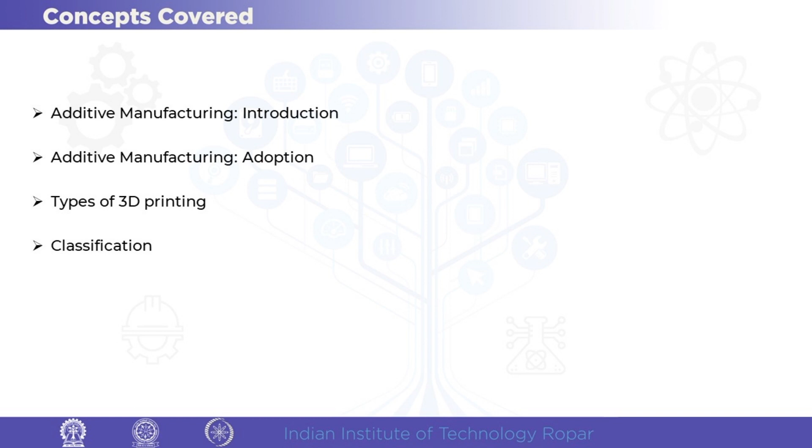Additive manufacturing is a new revolution in manufacturing. Driven by cutting-edge technologies and breakthrough innovations, additive manufacturing is reimagining production processes, redefining sustainable manufacturing. Additive manufacturing is currently more than 2.2 billion worldwide.

If you see the machines, there are a lot of machines which are being currently sold across US and globally. In India also, a large number of machines are being sold by various companies. The data which I am having is from 2012. At that time, lower cost machines, 35,000 were sold in US and especially in other places, and in US also the bigger machines were only 6,000. But now things have changed.

Now what we have is, with 20.50 CAGR, global additive manufacturing is supposed to be worth 34,846 million by 2028.

So welcome to the world of additive manufacturing, which is transforming India's manufacturing process and the worldwide manufacturing process in a very big way. It is opening new pathways to economic, technical and logistic advantages in the manufacturing domain. Additive manufacturing takes 90% lesser time and consumes 80% lesser energy.

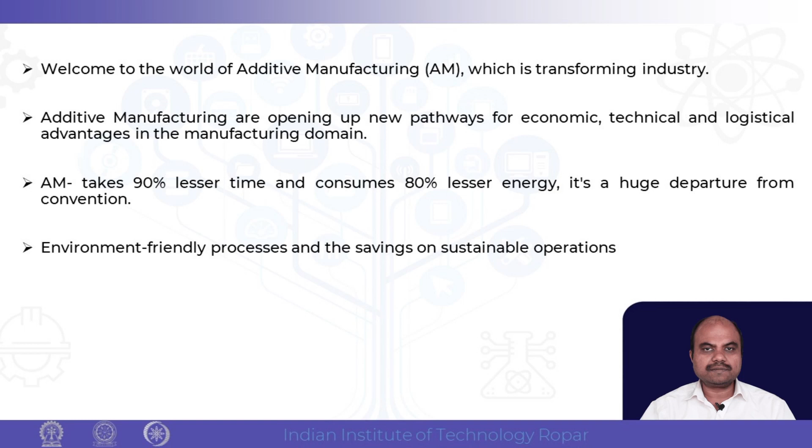While conventional subtractive manufacturing creates a 3D object by machining out material, additive manufacturing is popularly known as 3D printing. It makes layer by layer manufacturing and builds products in minutes. Both smaller and bigger sized components can be made using additive manufacturing. Very small, micro level printing is possible, whereas even in civil systems, bigger projects using additive manufacturing are also possible.

So additive manufacturing, or rapid prototyping, or 3D printing, prints faster and significantly reduces time to market, very fast. Whenever you want to print something, you make the CAD model, convert it to an STL file and give it to the computer, and the computer gives it to the 3D printing machine. So the time from design to manufacturing is very less, and this speeds up the overall innovation.

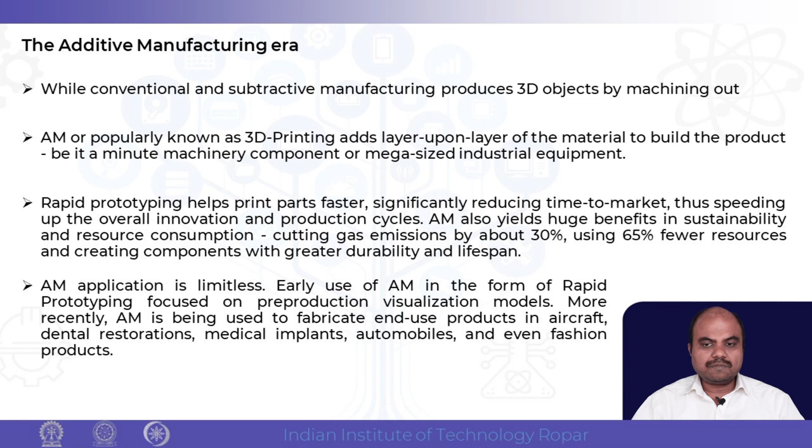So if you design a new technology or new product, you don't have to wait for a long time to actually realize it. Very fast we can design and produce a part in less time. So it is a huge benefit, and it's sustainable also. Resource consumption is less, cutting gas emissions are reduced, and applications are limitless. Various models can be fabricated, and it has various applications in various industries.

So whenever we see it adding up, almost 34% of US manufacturers have already adopted additive manufacturing in their manufacturing plants and manufacturing systems.

It is not required that we have to remove the traditional manufacturing process. Additive manufacturing process can replace some portions or some processes. However, it should actually be an addition to the manufacturing technologies and machines which a company already has, so that companies can use the added advantage for multiple applications.

So applications are diverse, from automobiles, energy, medicine, aerospace, so many applications. NASA has successfully used rocket injectors made with additive manufacturing, and in Formula cars, 3D manufactured products have also been used. A wide range of materials can be covered, which can be used for industrial applications and also for other applications.

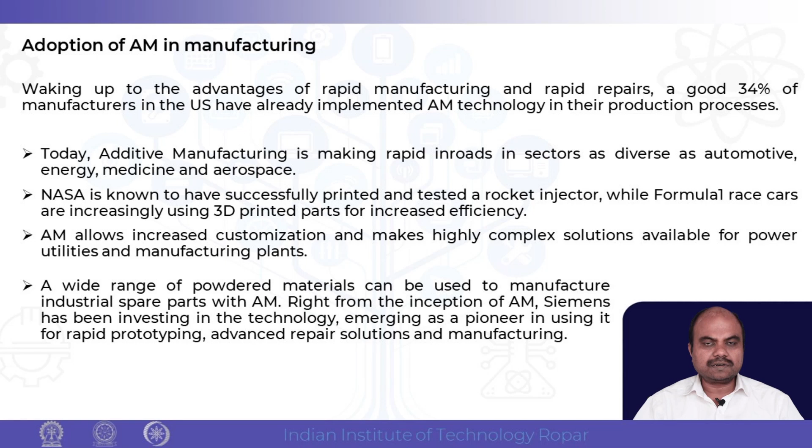So additive manufacturing is also known as 3D printing. It refers to a manufacturing process which creates a 3D object using multiple layers of material to form a component. There are various methods for additive manufacturing, and various materials can also be used like glass, plastic, ceramics, metals.

There are also other terms like 3D printing, rapid prototyping, direct digital manufacturing, layered manufacturing, and additive fabrication. All of them are similar kinds of terms used to depict the additive manufacturing setup and processes.

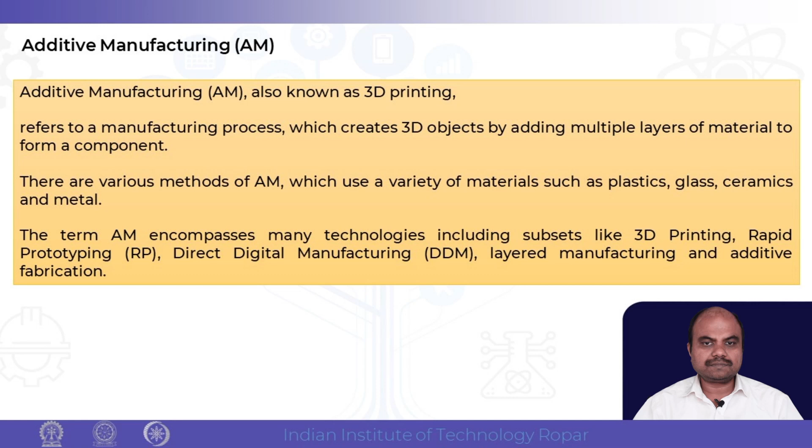As per standard, there are various additive manufacturing processes, but there are 7 major additive manufacturing processes which we are going to learn soon. And why this difference is in terms of building mechanisms, price point, materials, usage. There is a little bit of difference in all this. Actually, some of them are quite different with respect to each other.

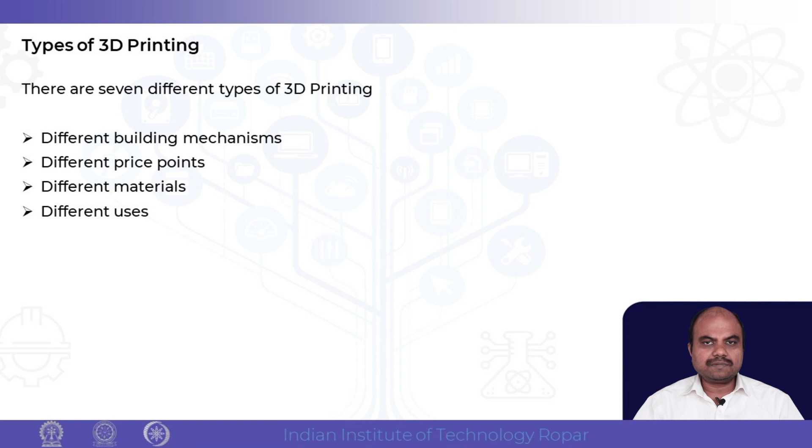So why is additive manufacturing used? It is used for prototyping, low volume manufacturing, and tooling. Tooling means - previously, especially for plastic bottles or anything you want to make, dies are very expensive. You have to use 5-axis, 6-axis, 7-axis milling machines, CNC milling machines to make a die, and it takes a lot of time also. Now, many tooling processes can be done in metal additive manufacturing, and of course post-processing is required, but that is much less time consuming compared to the total time required for conventional manufacturing.

Consumer products can also be made. Customization is very much possible with additive manufacturing because previously we used to have one design which is being made multiple times. Now, with additive manufacturing, every time we print we can customize it easily.

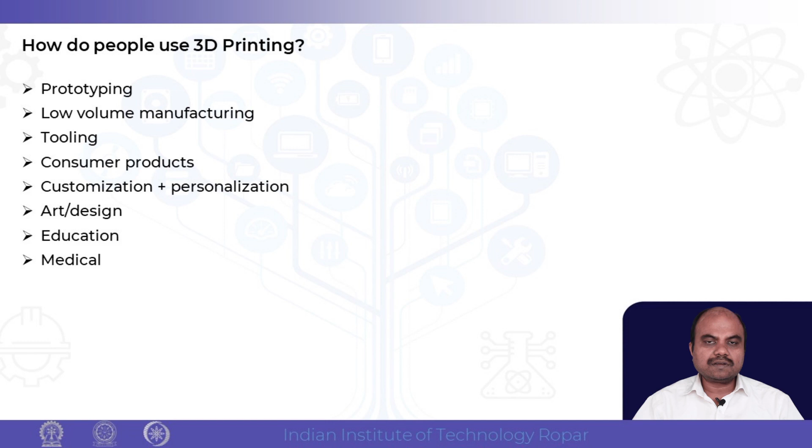Art production can be done with AM also, and see how it looks. For design checking, you can make more prototypes and check whether the design is okay or not. Apart from that, the same prototype can also be analyzed. For education, AM is used. For medical, there are a lot of applications, many places AM is used.

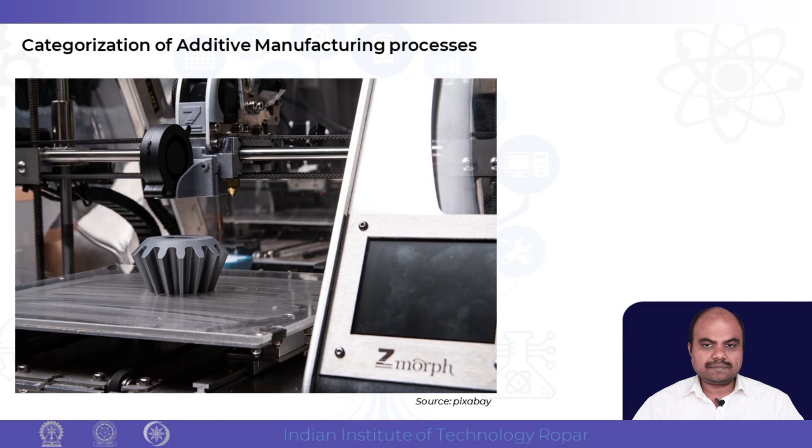So now, categorization of additive manufacturing process. Here you see one image of a metal additive manufacturing machine. As per ASTM F42, additive manufacturing processes are classified into 7 major categories. The difference between these is basically the material used, the deposition technique used in the machines, and the way the material is being fused or solidified.

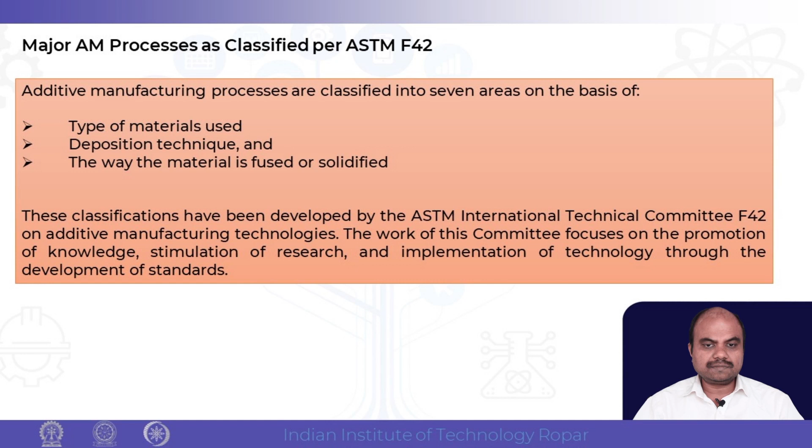So what are the 7 additive manufacturing processes according to ASTM F42? One is photopolymerization, second is material jetting, third is binder jetting, fourth is material extrusion, fifth is powder bed fusion, sixth is sheet lamination, seventh is direct energy deposition.

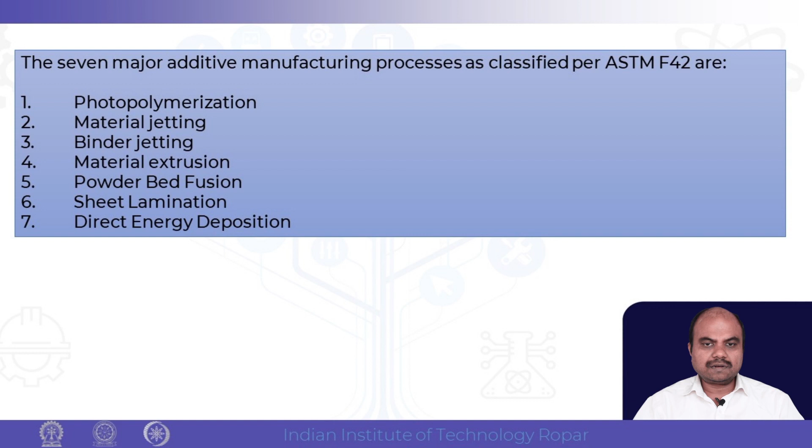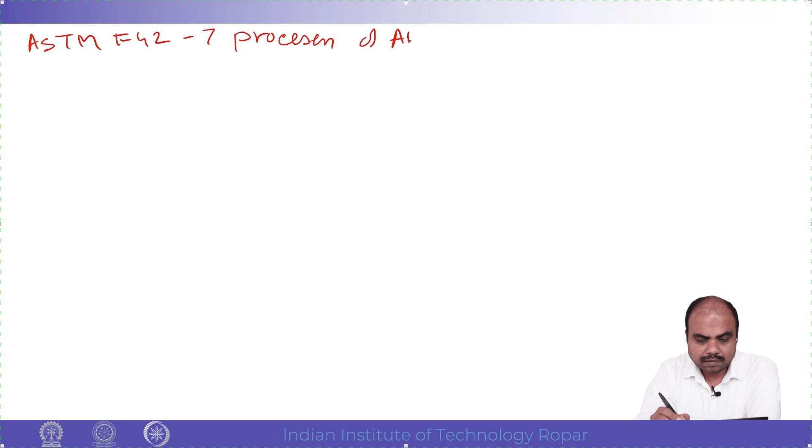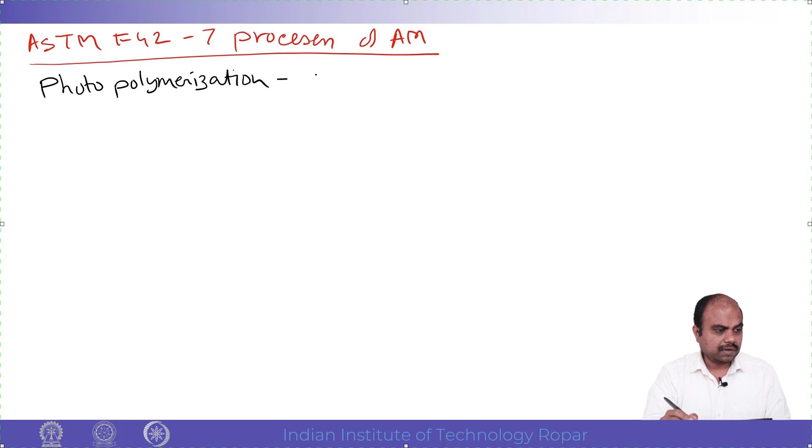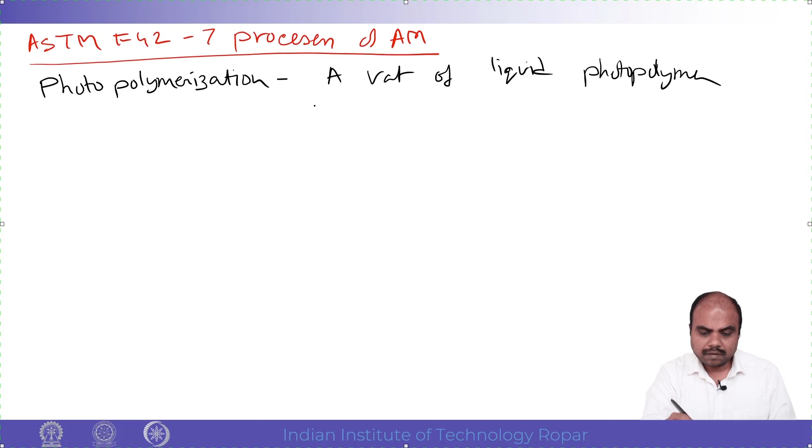Now we are going to learn more in depth. So according to ASTM F42, there are 7 techniques, 7 processes basically. One is photopolymerization. In this, basically a vat of liquid photopolymer resin is cured through selective exposure to light. Resin is cured selectively using light, laser, UV, etc. The next one is material jetting.

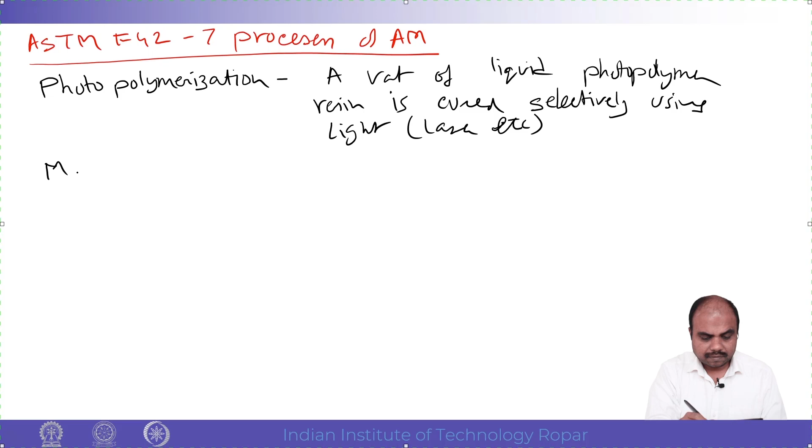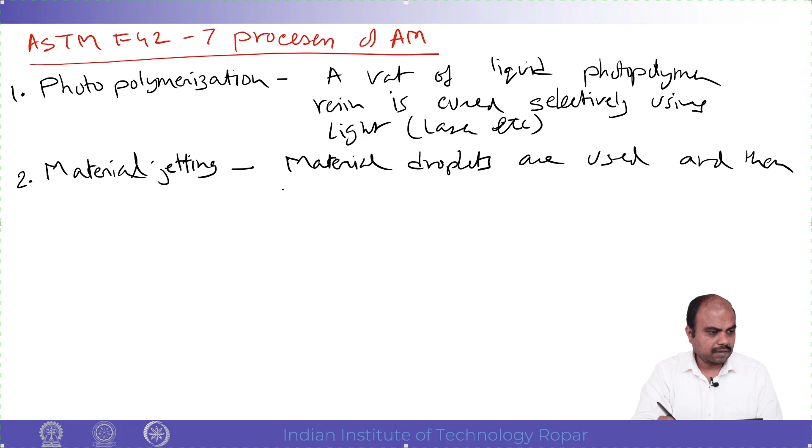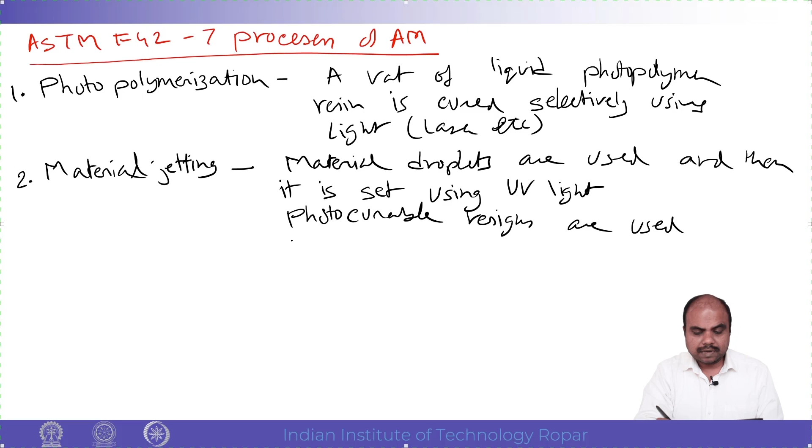Second one - in this, material droplets are used, and then it is set using UV light. So here also photocurable resins are used. This was originally termed as 3D printing.

There are multiple names which exist for this photopolymerization technology. Some of the names are stereolithography, SLA. It is also called digital light processing. These are very similar technologies, but they are not the same - they are a little different from each other. Then there's clip technology, that is continuous liquid interface production - clip also falls under this system. Then there's scan, spin, and selective photo cure. These names exist because different companies are making technologies which fall under the main photopolymerization technique, but the name is different and also the technology is slightly different. Like clip technology is much faster, a little less accurate, but very fast.

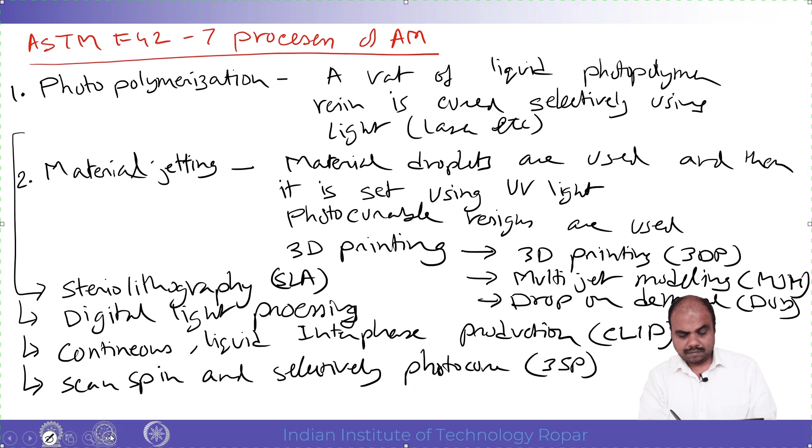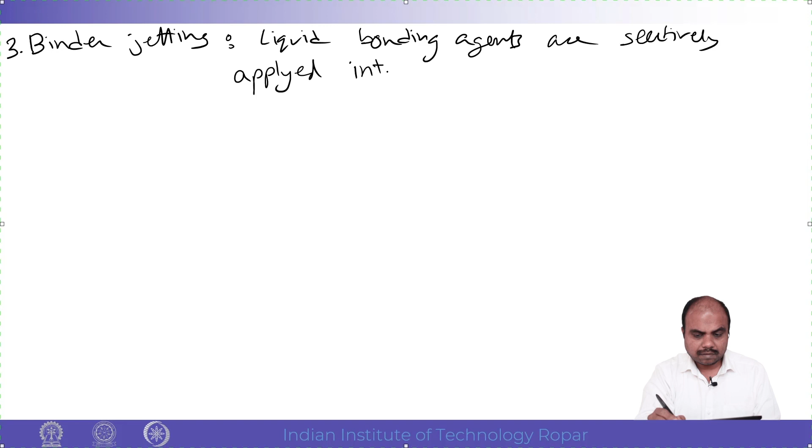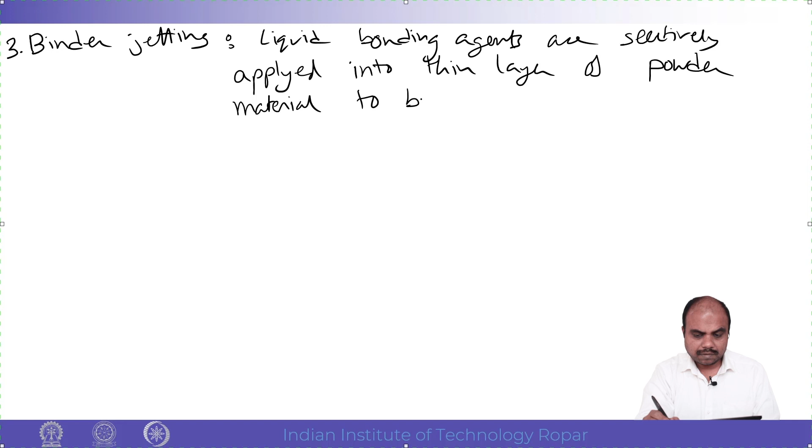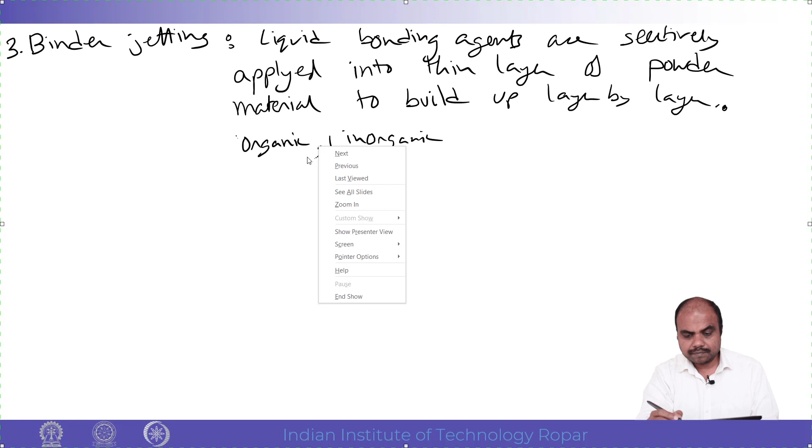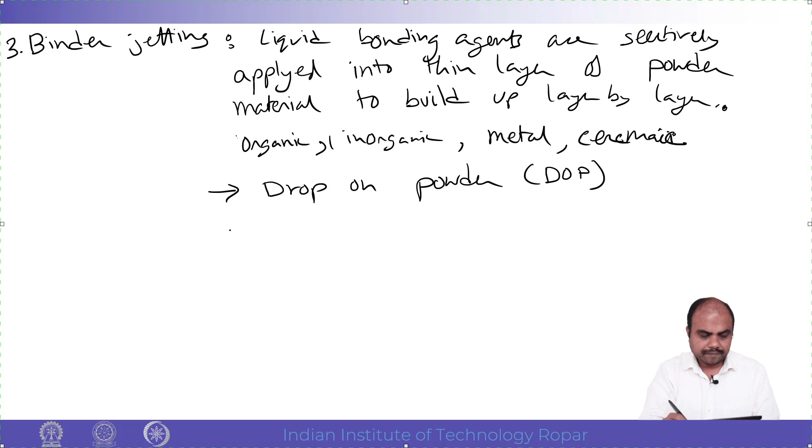In this process, materials can be organic, inorganic, it could be metal also, metal, ceramics, etc. The other names for this are drop on powder, DOP, and powder based printing.

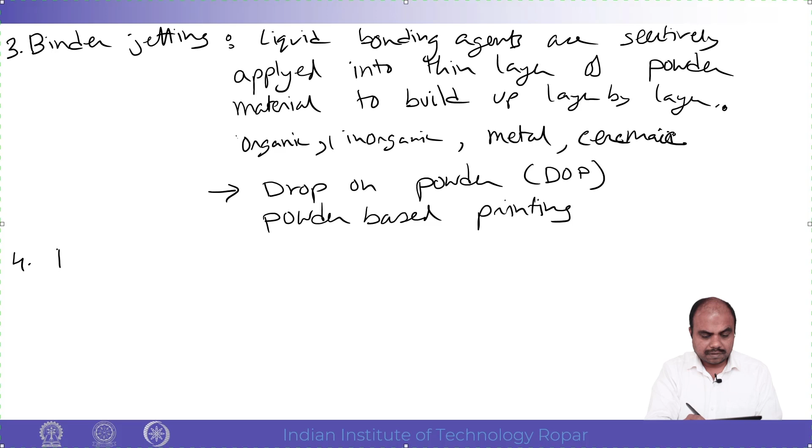The next one is material extrusion. In this, the material is extruded through a nozzle and made into multiple layers. Generally, thermoplastics are used. This is one of the most widely used techniques, and FDM is one of the machines - various companies have actually made this machine and are selling it in the market at a very cheap price.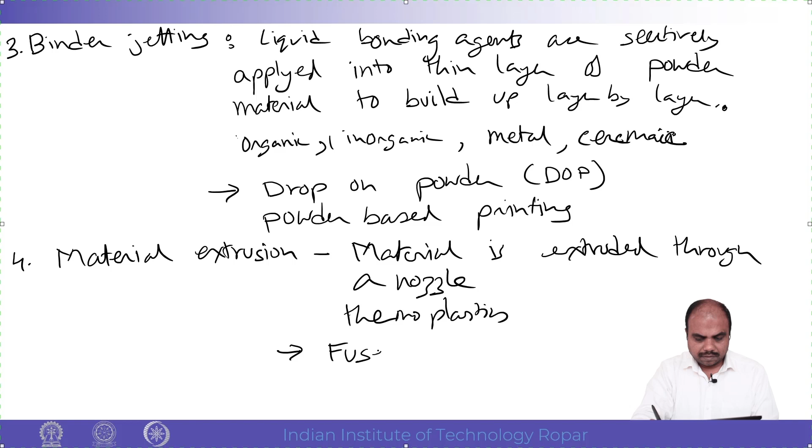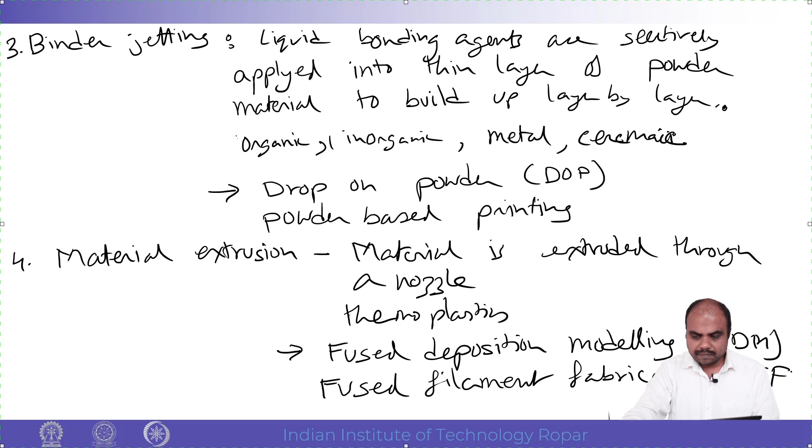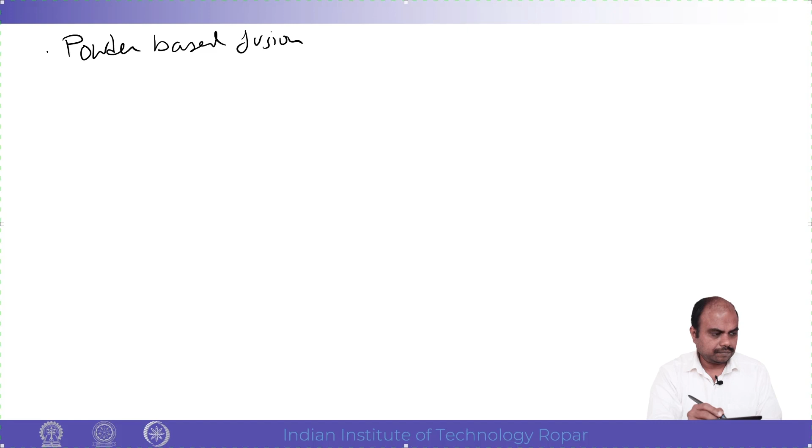The technologies here are fused deposition modeling, FDM, and fused filament fabrication. That is the next one, that is powder bed fusion, the fifth one. In this, the technology is that powder material is selectively consolidated and melted together using a heat source such as a laser.

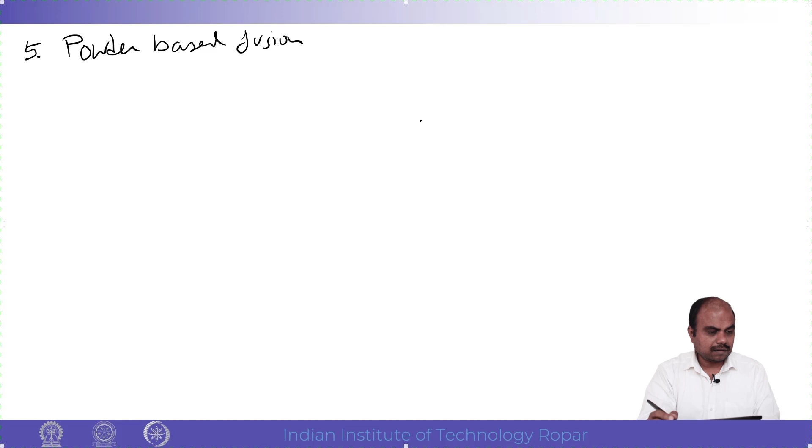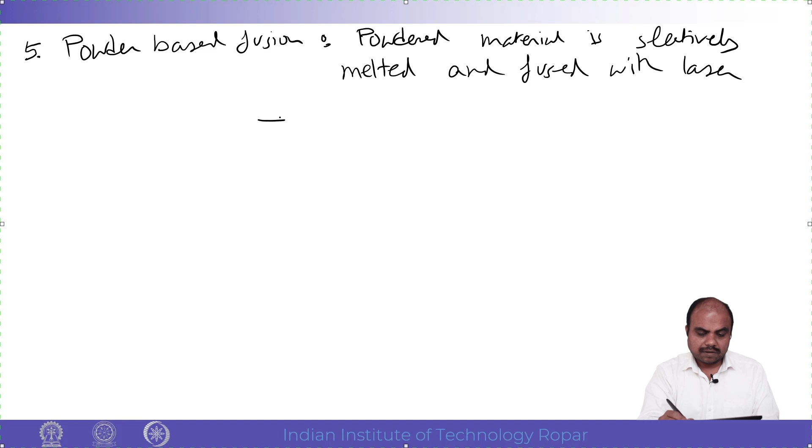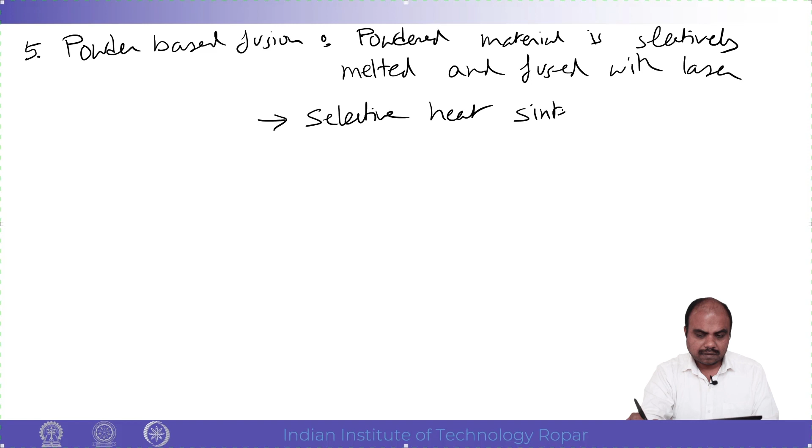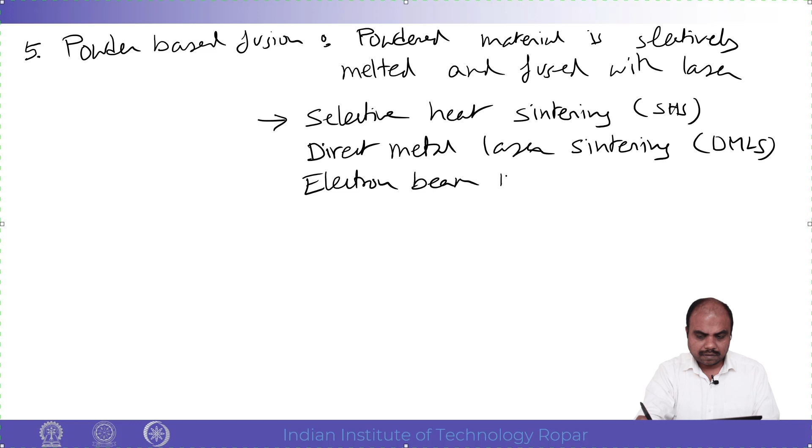So here powder - this is a widely used technique, especially for metal. The technologies which come under this one are selective heat sintering, direct metal laser sintering, electron beam melting, selective laser melting, SLM, and selective laser sintering. This is one of the widely popular names which many of you may have heard about.

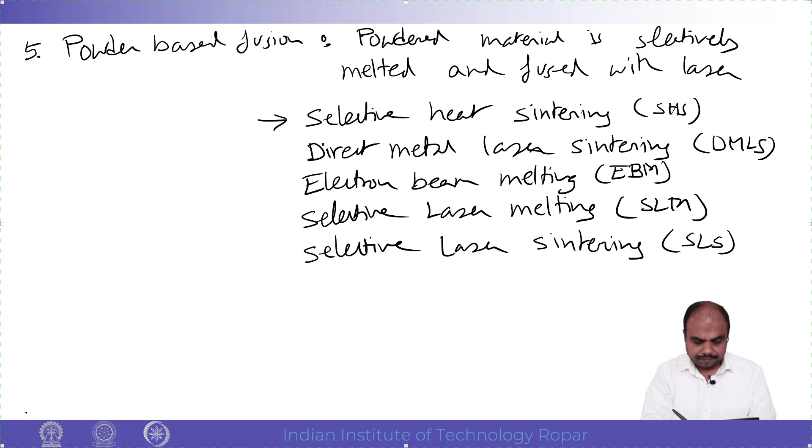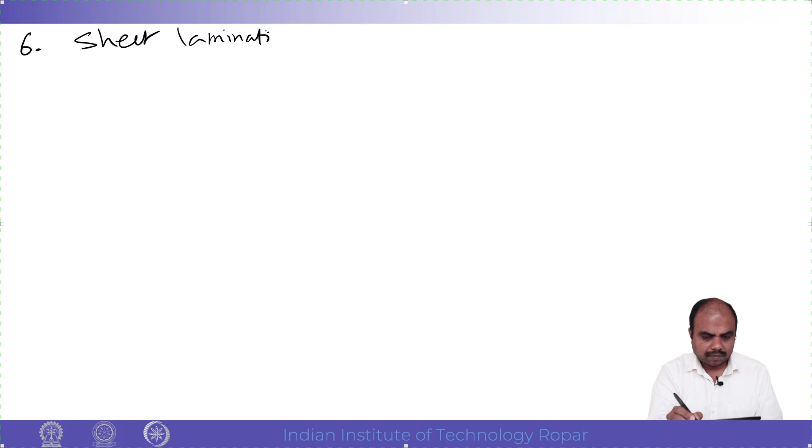Sixth one is about sheet lamination. In this technique, sheets of materials are stacked and laminated together to form the object. It could be the method for sticking or making the object, using adhesive, ultrasonic welding, or even brazing.

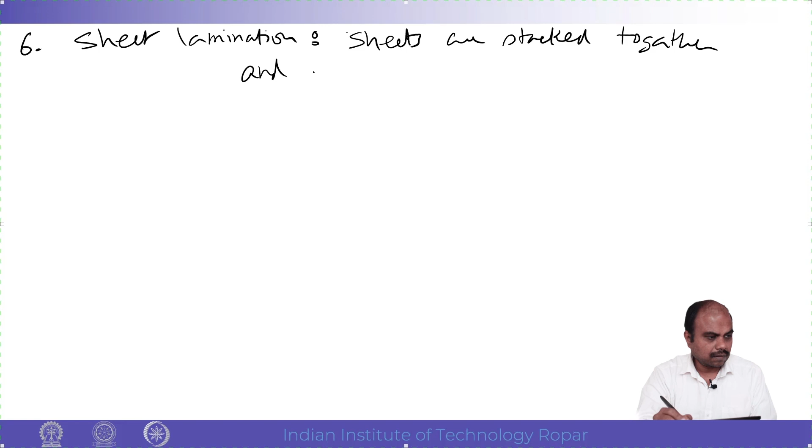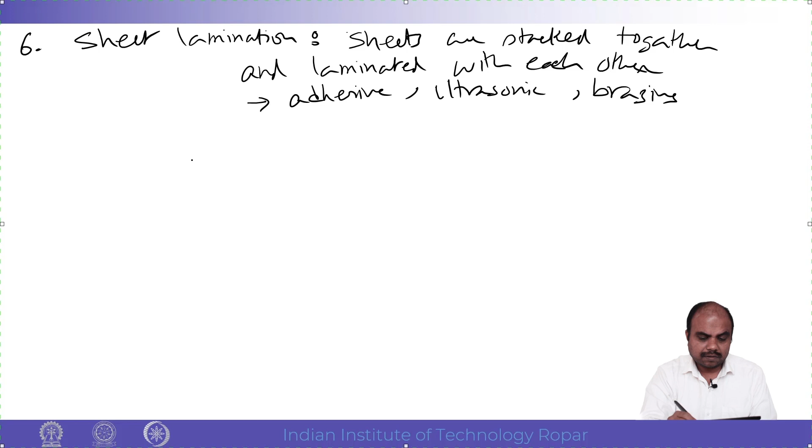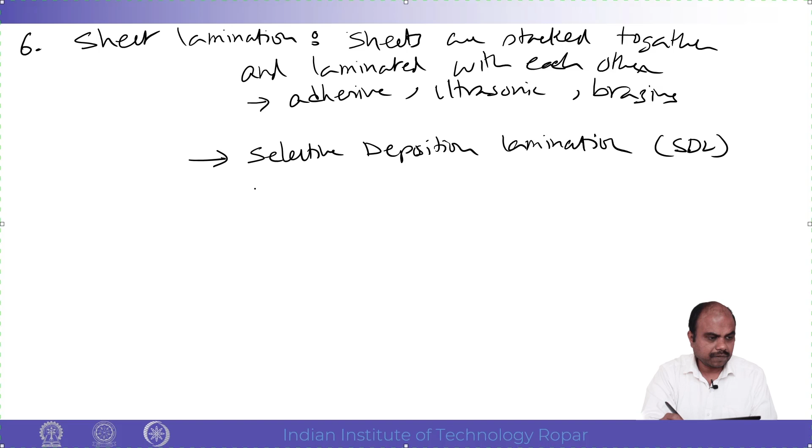This could be using adhesive, it could be using ultrasonic, or brazing. So the technologies under this are selective deposition lamination, that is SDL; laminated object manufacturing, which many of you would have heard of, one of the popular methods; and ultrasonic additive manufacturing.

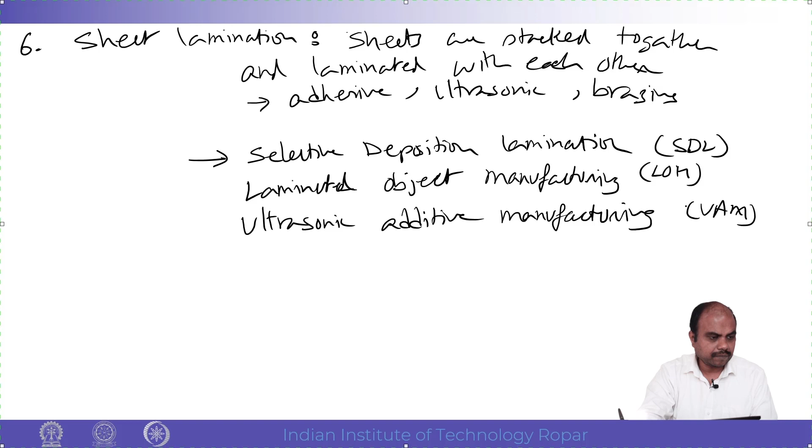The last one which we are discussing is direct energy deposition. In this, basically powder metal or wire is fed into the melt pool, which then generates a surface, and this is basically made into liquid format almost.

And then the laser or electron beam is used. So the metal powder or wire is fed into a melt pool, and we are using laser or electron beam.

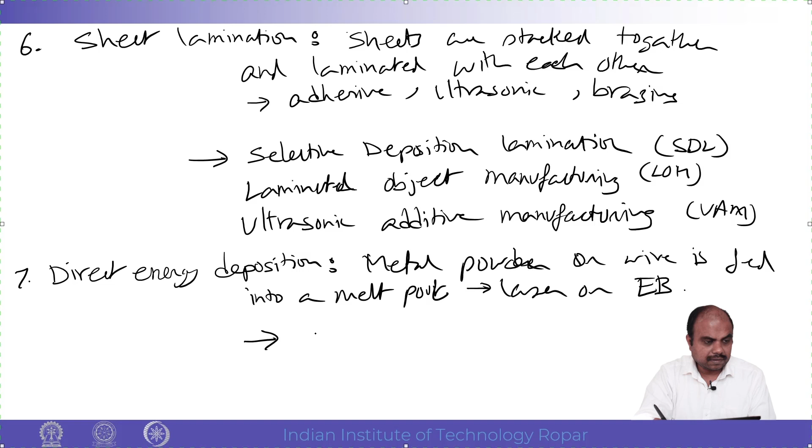Technologies under this one are laser metal deposition, electron beam free form fabrication, direct metal deposition, and laser engineered net shape.

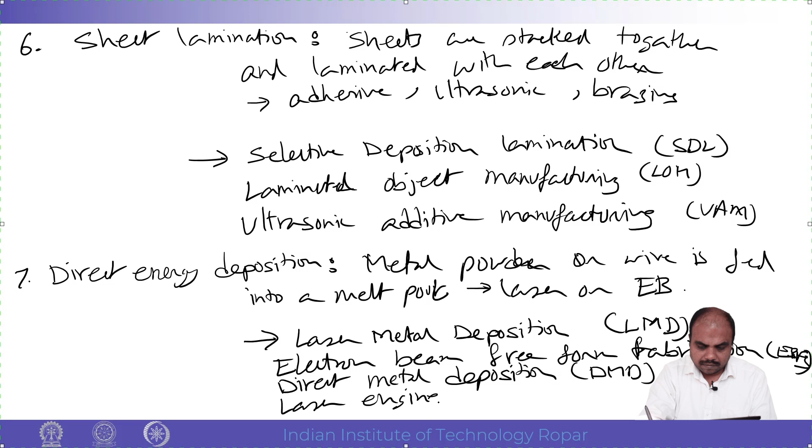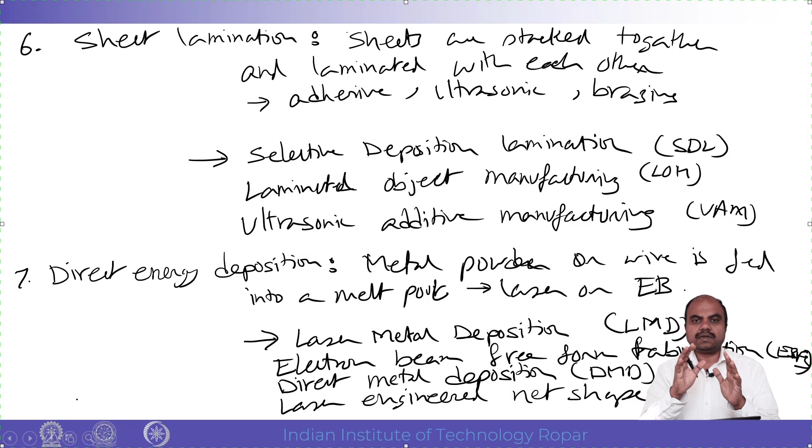So now we have seen all these 7 techniques, and the other names which are followed for these techniques. Now we will see how the categorization can be done. So additive manufacturing process could be either liquid based, solid based, or powder based, right?

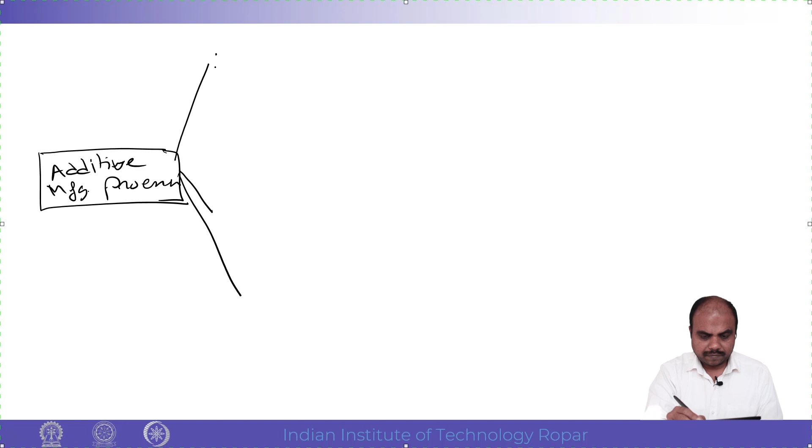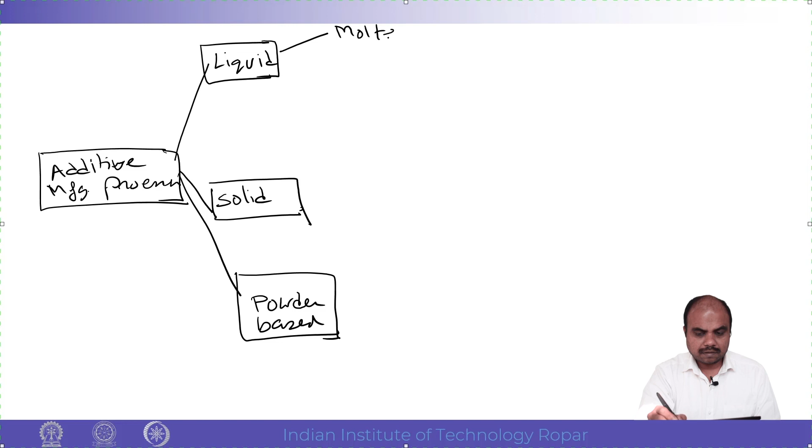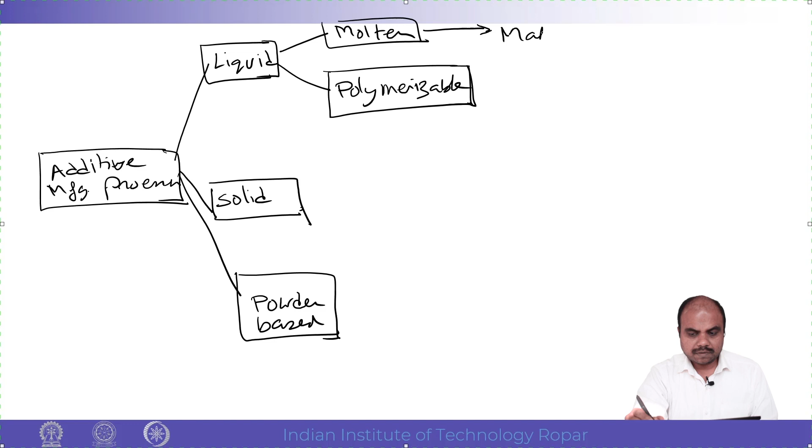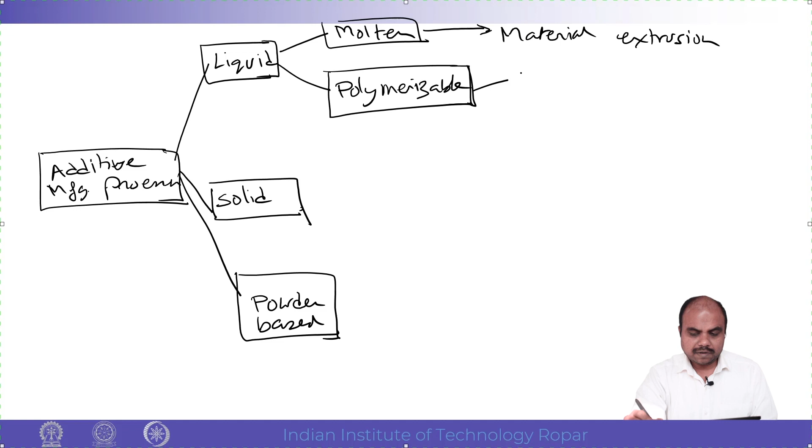So under liquid phase, it could be one is molten, and next possibility is polymerizable. If it is molten, it could be material extrusion; if it is polymerizable, one option is vat photopolymerization.

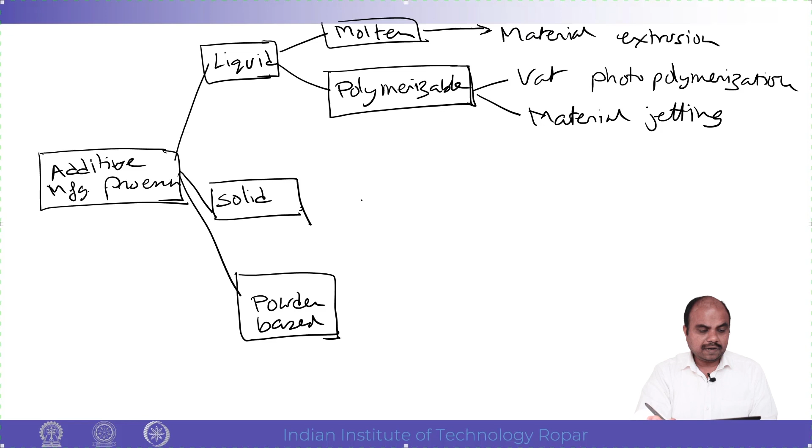Second possibility is material jetting. If it is solid, then of course bonded objects, and as we have already learned, solid means sheet lamination.

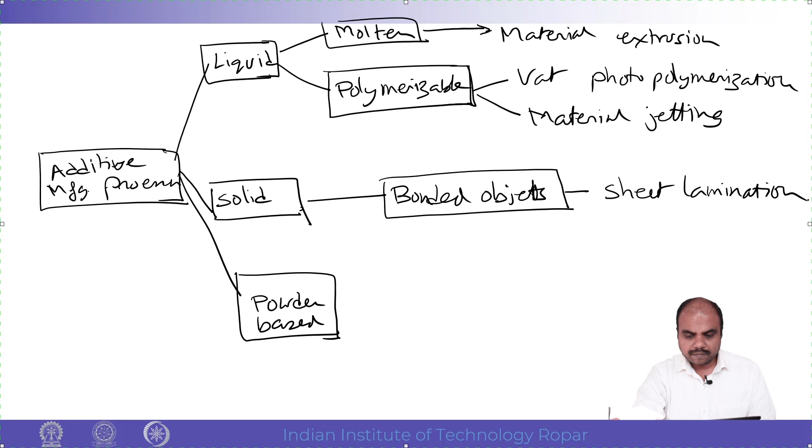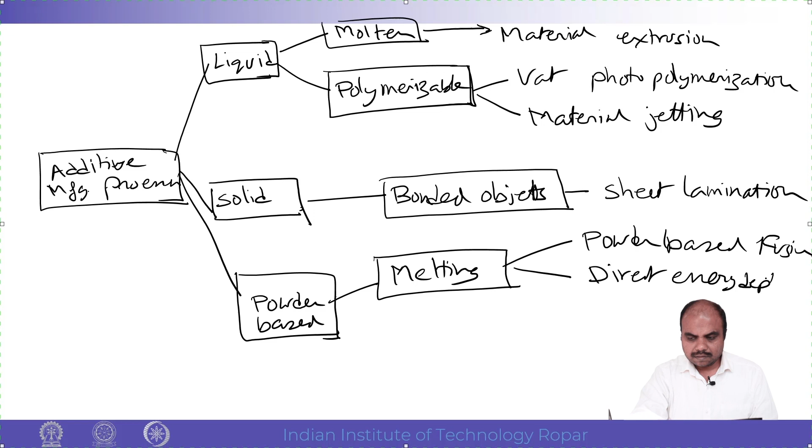Now powder based, it could be one is melting; if it is melting, one could be powder bed fusion. The next possibility is direct energy deposition. Or it could be binding also; if it is binding, then binder jetting.

So now we have seen the 7 technologies which are there, and how this can be categorized with respect to each other.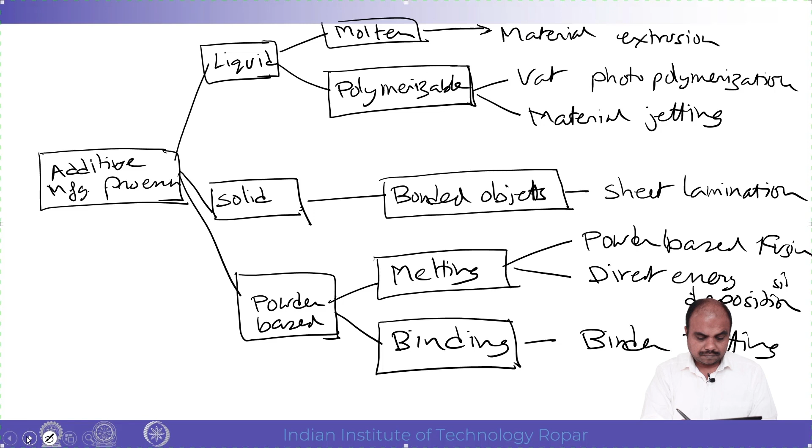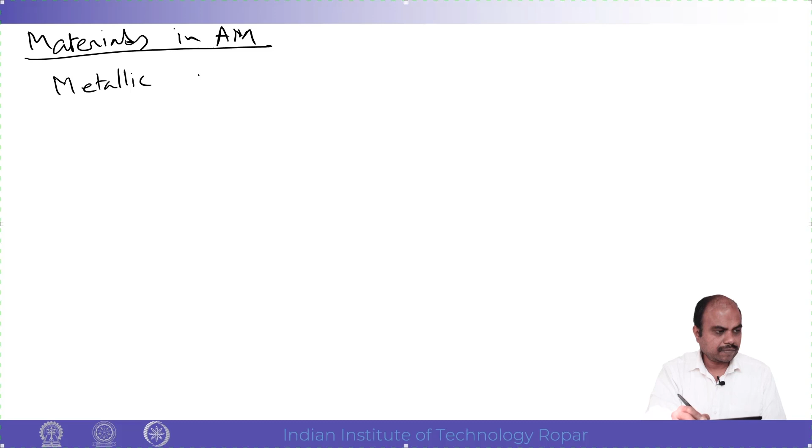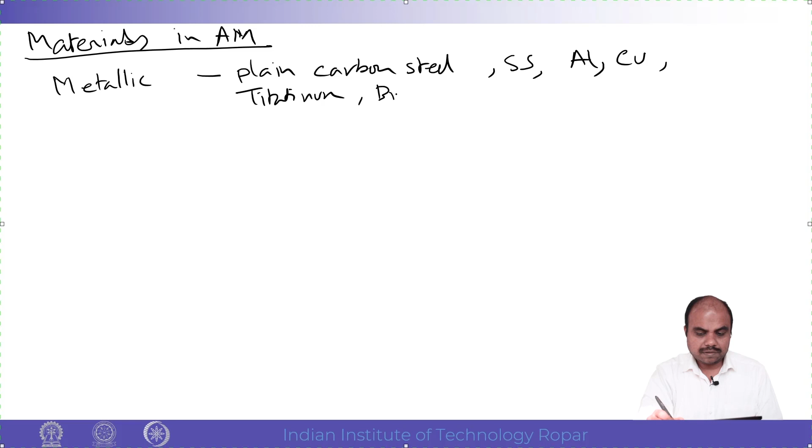As far as materials are concerned, there are so many materials possible to use in additive manufacturing. Some of the materials are metallic materials, that is we can use plain carbon steel, stainless steel, aluminum, copper, titanium, bronze, nickel, and various others.

For polymers, that is plastics, we can use ABS, acrylonitrile butadiene styrene, nylon, polycarbonate, polypropylene, epoxides, glass-filled polyamide, Windform, polyester, polystyrene. So many other materials can be used.

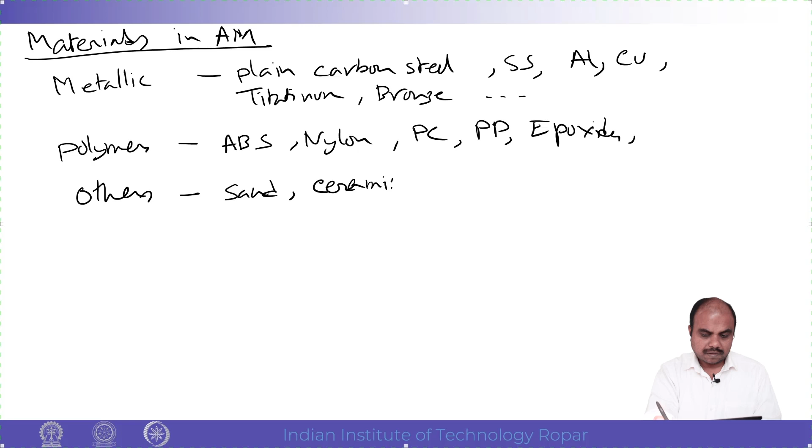There are also others which are not coming under this. We can use sand, ceramics, tungsten, wax, starch, plaster, similarly. So many materials we can use.

Biocompatible materials - there are various biocompatible materials which can be used. Some of the names I'll write: PCL, and there are several others also.

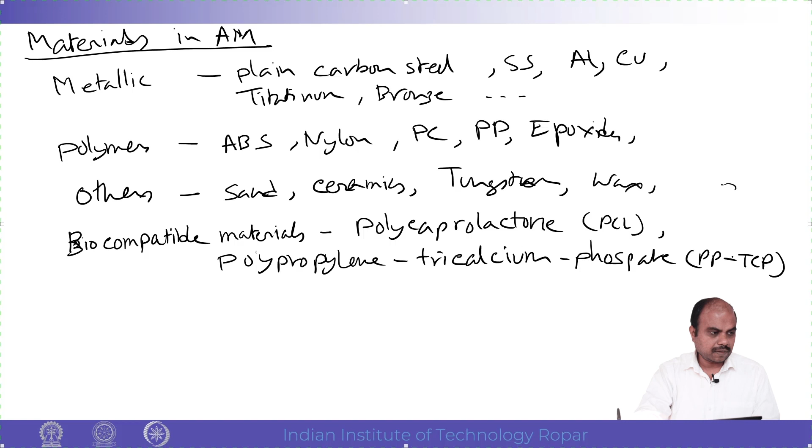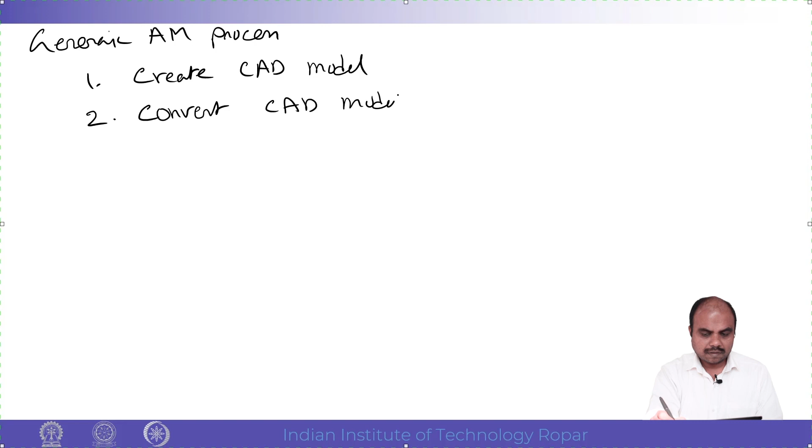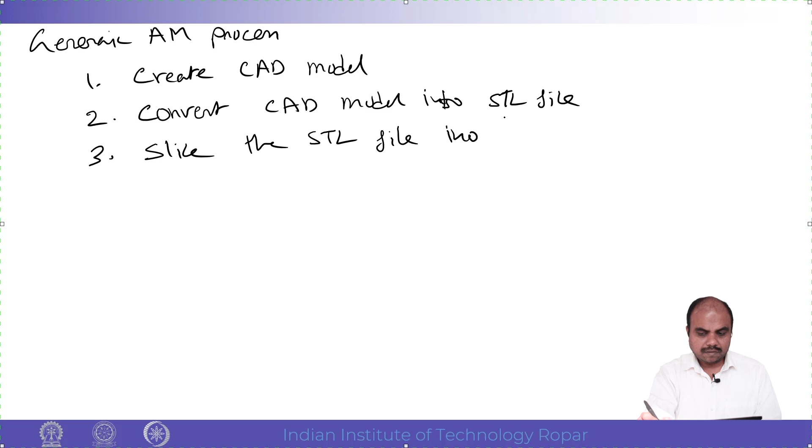So now we have to learn a little bit of the generic way of additive manufacturing. First is create CAD model. Next, convert the CAD model into STL file. Third one is slice the STL file into cross sections. Then construct the model by printing using a machine, and fifth, clean and finish post processing if required.

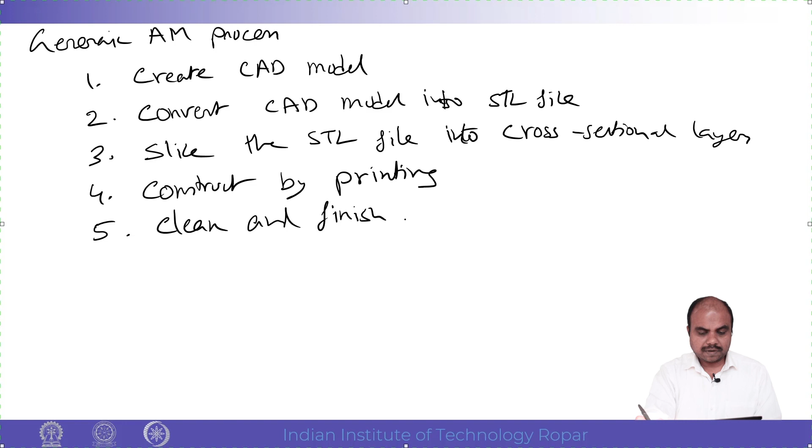So let me explain a little bit. First you make a CAD model using any CAD software and then convert into a .stl file. It is a stereo-lithography file, also standard tessellation language, and this .stl file, which is basically from the CAD, can be used to print the 3D object using the machine.

And then this slicing - so if this is the object, it has to be sliced, and this slicing is generally done by the software already given by the manufacturer of the machine. There are various reasons for it, like how the quality of the product, accuracy, and all these things depend upon this. So how many cross sections you need depends upon some factors related to this machine.

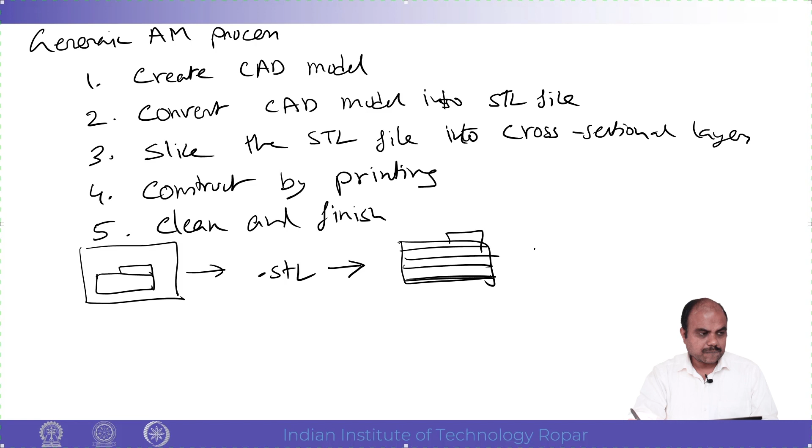And then once we have this, the next one is we're going to print it, of course. So then orientation is important, and if support material is required, we need to add support material also. Then the machine will actually go to print.

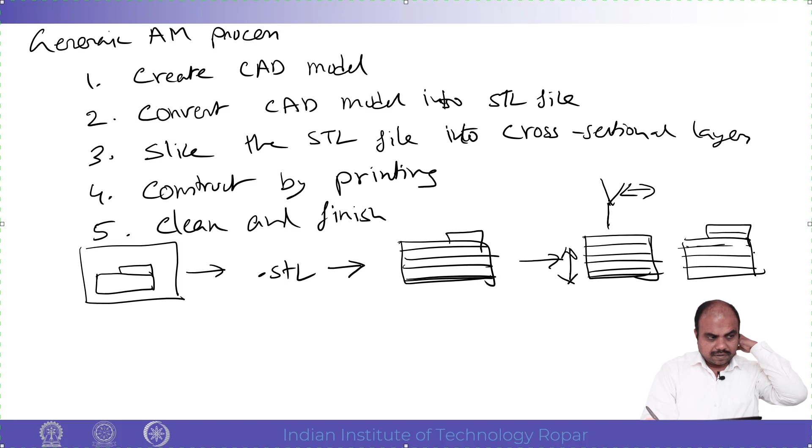And then layer by layer the machine prints the product, and after printing is done, post processing may be required because some marks will be on the surface, and the quality has to be improved. These things are required for this. Thank you.